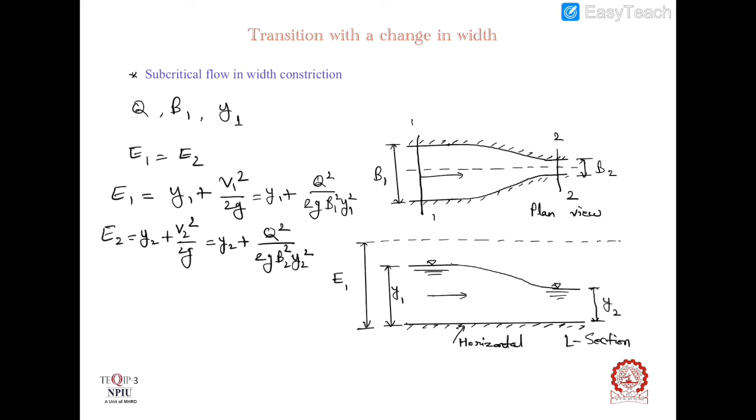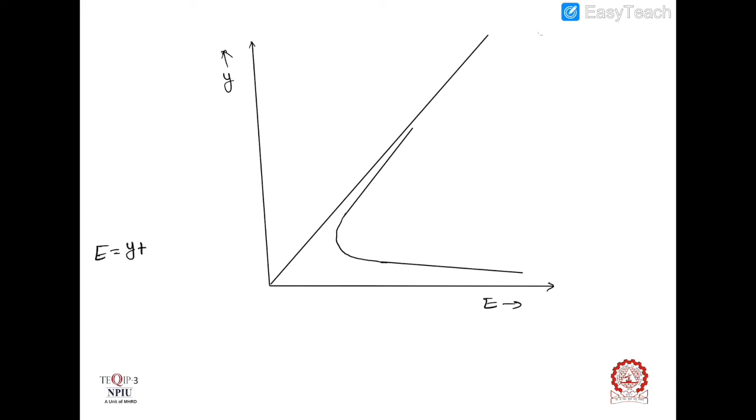Now, to analyze the flow, we will use a specific energy curve. In case of hump, the width at section 1 and section 2 was same, hence there was only one specific energy curve. But in this case, we have different width at section 1 and at section 2. Now we will see how changes will occur in a specific energy curve for this change in width. Firstly, let's write equation of specific energy. E is equal to Y plus Q square divided by 2G B square Y square.

Here in this equation, if we decrease the width of the channel, then what will happen? Let's keep all other parameters constant: Y is constant, Q is constant, G is constant. So if we decrease the width of the channel, then this term will increase and ultimately the specific energy will increase. So for a particular depth of flow, if we decrease the width, the specific energy, shown by this axis, will be increased.

So the specific energy curve will shift towards right or to the left of this specific energy curve. Suppose this is specific energy curve for B1, and we are reducing the width. By reducing the width, the specific energy is increasing. Hence the specific energy curve will shift to the right of this specific energy curve. So this will be the specific energy curve for width B2, which is less than B1.

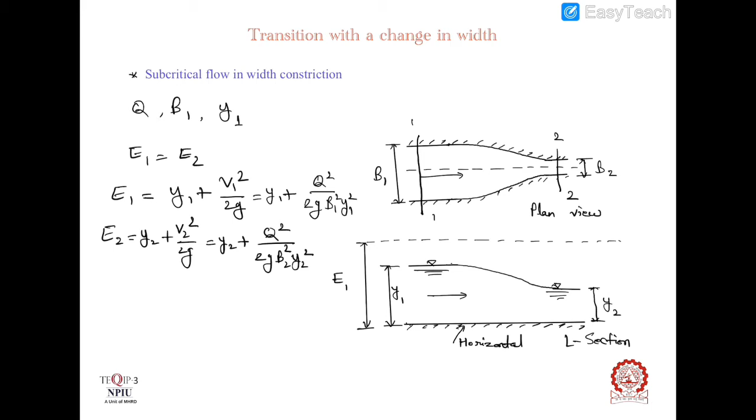Now we know that in this situation, since the transition is smooth, we are considering a frictionless channel and there is no change in the bed of the channel, the specific energy at section 1 and at section 2 are same. So let's draw a line for a constant specific energy. Suppose the specific energy at section 1 is E1. So the specific energy for section 2 will also be equal to this E1. So E1 is equal to E2. Now what about the depth of flow?

Remember, this is a specific energy curve for section 1 for width B1 and this is a specific energy curve for width B2. Now for the same specific energy, let's say the depth at section 1 is Y1. So this vertical line cuts the specific energy curve at this point. Here we are considering the upper portion of the specific energy curve because we are considering a subcritical flow. The upper portion of this specific energy curve is for subcritical flow and the lower portion is for supercritical flow. Okay, hence we are considering the upper portion.

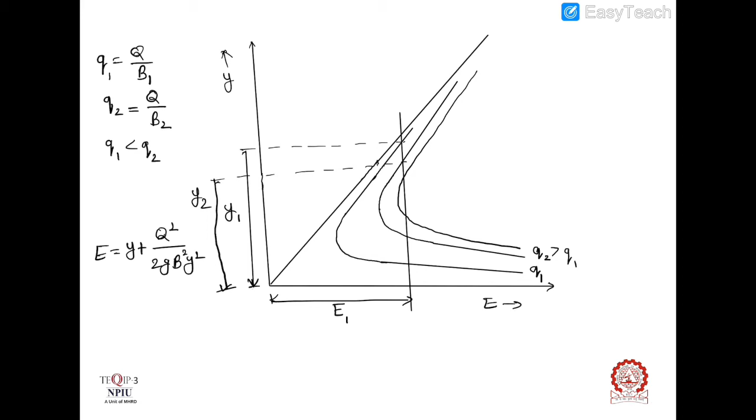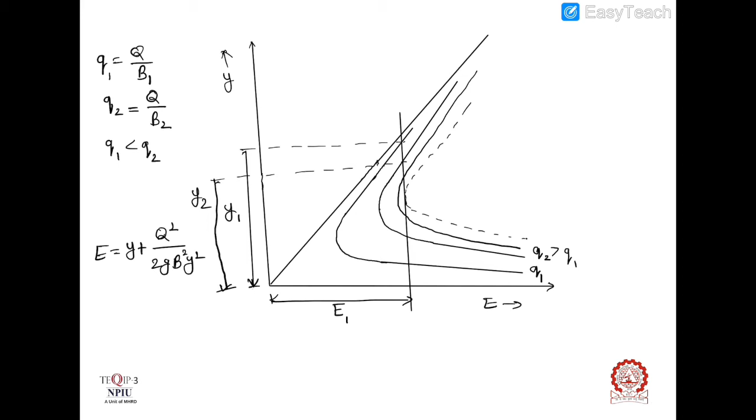Now what if we further reduce the width of the channel at section 2? Then in that case the specific energy curve will shift to the right again, the specific energy will be constant, and the depth of flow will be further reduced. Clear? And this will continue till critical flow starts at section 2. Suppose for a particular width the specific energy at section 2 becomes minimum. At this condition at section 2 there will be critical flow, and the corresponding width is denoted by B2m. This is the width for which the flow at section 2 will be critical, and the depth of flow will be critical depth, denoted by YCM.

And for critical flow condition, we can write the equation E1 is equal to ECM is equal to YCM plus Q square divided by 2g B2m square YCM square. Remember, so far there is no change in the depth of flow at section 1. We are changing the width of the channel. Due to this, the depth of flow at section 2 is reduced, but the depth at section 1 will remain constant, and the specific energy also does not change. At both the sections the specific energy will be the same.

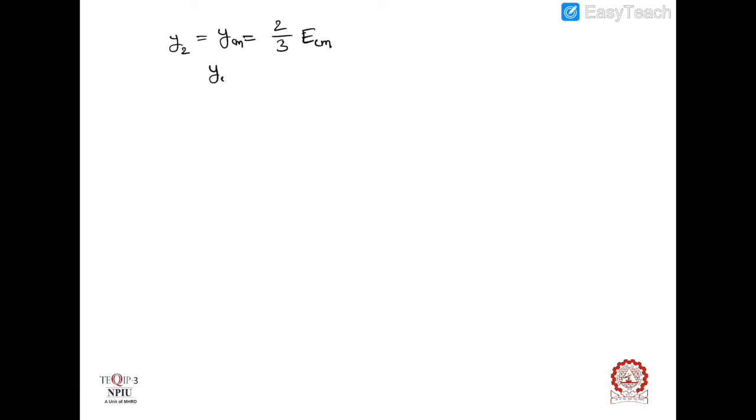Also YCM is equal to q square divided by g, whole to the power 1 by 3, where small q is discharge per unit width. So small q square we can replace by capital Q square divided by B2m square, into g, whole to the power 1 by 3. Or B2m is equal to square root of Q square divided by g YCM cube.

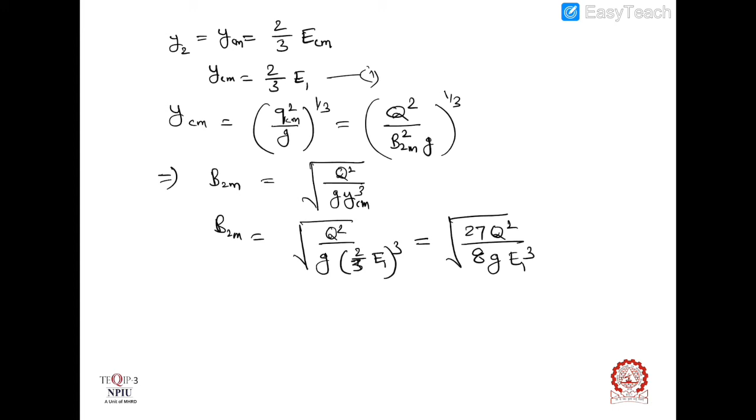Now substitute the value of YCM in terms of E1 here. So B2m will become square root of Q square divided by g times 2 by 3 E1 whole cube, or it will be equal to square root of 27 Q square divided by 8g E1 cube. Clear? So this is the expression of B2m in terms of discharge and specific energy at section 1.

Now the question is, what if we further reduce the width at section 2 in the channel beyond B2m, meaning B2 is less than B2m? See in this plot, this specific energy curve corresponds to the width B2m at which the critical flow condition starts at section 2. If we further reduce the width at section 2 below B2m, then in that case the specific energy curve will further shift to the right hand side in this way.

Now in this condition the flow is not possible. Why? Because the specific energy at section 1 is not sufficient to cause the flow in the channel. Okay, so to cause the flow it is required to increase the specific energy at section 1, which is sufficient to cause critical flow in section 2.

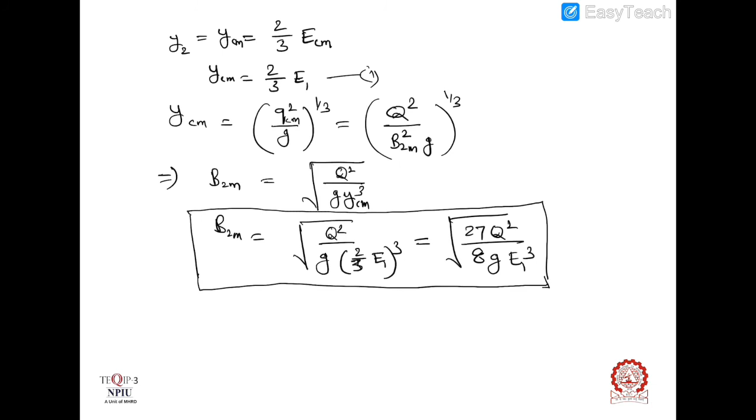Now in this case, when B2 is less than B2m, there will be a critical depth at section 2, but its magnitude will be more than YCM, the previous critical depth which occurred when the width we reduced equal to B2m. In this case, when B2 is less than B2m, the new critical depth will be there, but its magnitude will be greater than the previous critical depth.

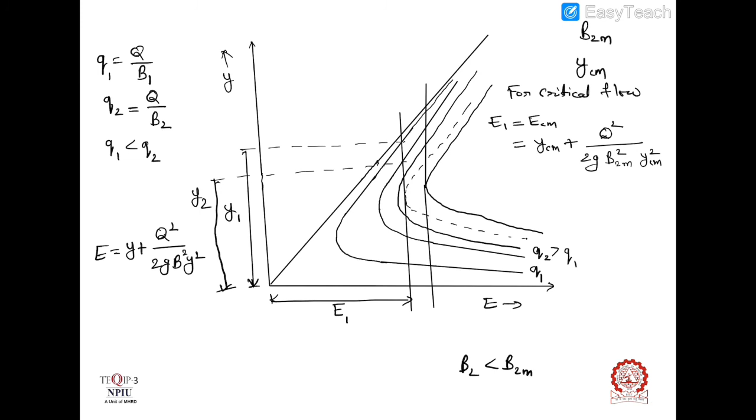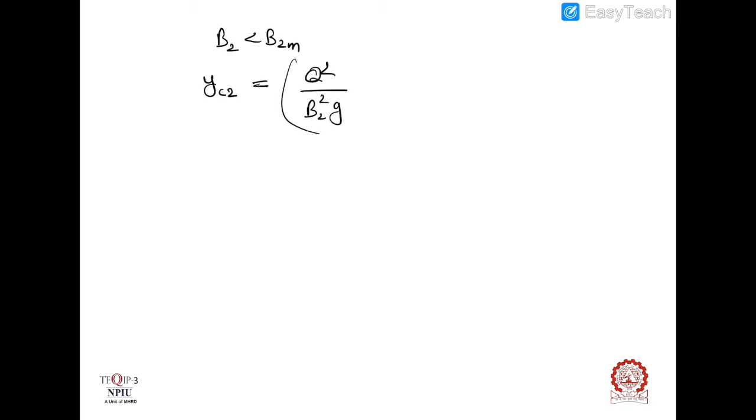Okay, from this figure we can see that in both the conditions there is a critical flow, and in both the conditions there is a critical depth, but their magnitudes are different. Here a new critical depth will generate, and this we can express in terms of discharge, that is Q square divided by B2 square G, whole to the power 1 by 3.

And the equation of specific energy will be E1 dash is equal to Y1 dash plus Q square divided by 2G B1 square Y1 dash square. Okay, this is the expression of specific energy at section 1. Here remember E1 dash is now greater than E1.

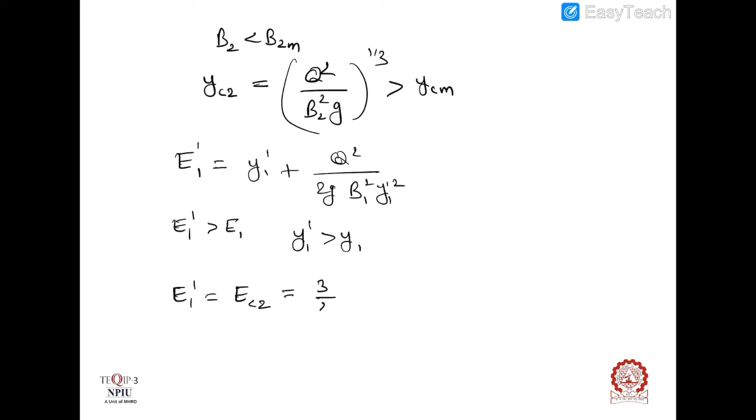Here this depth of flow Y1 dash is greater than Y1, and this YC2 is greater than YCM. Here one more thing is that this E1 dash is equal to the specific energy at section 2. So E1 dash is equal to the new specific energy at section 2, which we can represent by EC2. This is the minimum specific energy, but its magnitude is equal to the specific energy at section 1, and which is also equal to 3 by 2 times YC2, or 1.5 times YC2.